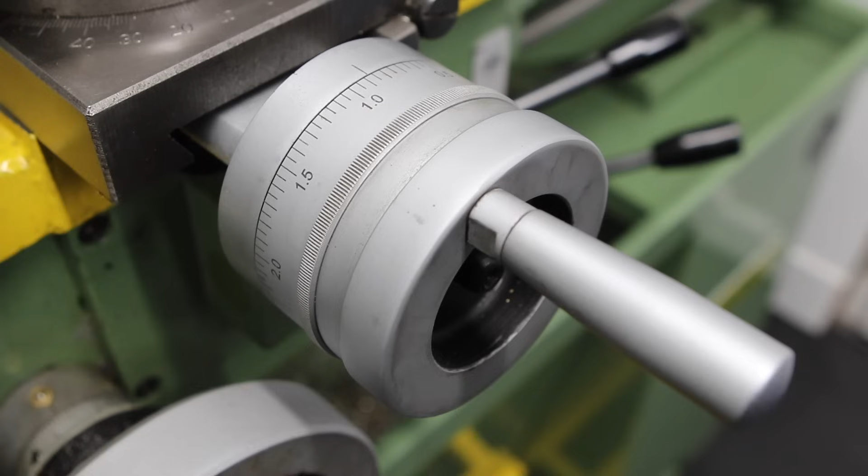I've got a plan to build myself a rotary table, and that rotary table is going to have graduations around the outside of it, very much like this hand wheel. Currently I don't have a solution for inscribing those graduations, so today's video is all about designing and building a simple dividing attachment for the lathe.

The first problem we need to solve is how to lock the spindle so that we can accurately scribe a line in the workpiece. The second problem is how to index the spindle around by a given amount. For the rotary table, I want a division every degree, so we need 360 divisions, 360 scribe lines.

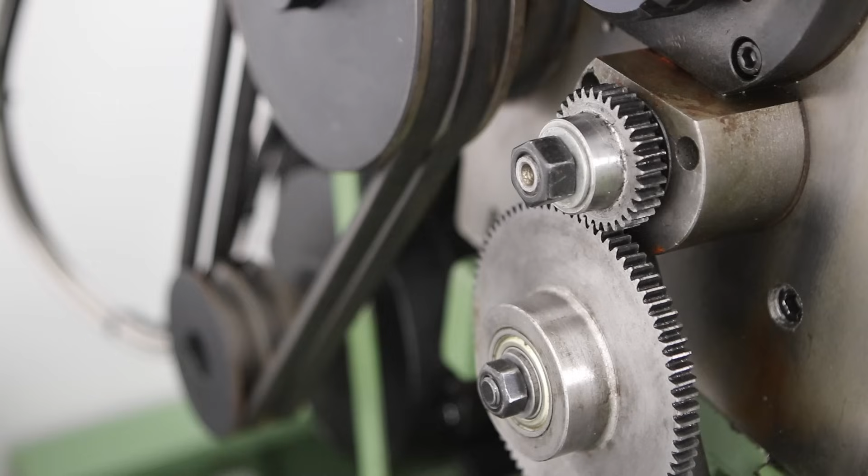There are many different types of dividing attachment for the lathe, but most of the homemade ones that I've seen tend to use the change wheels, as we can see here. What most people do is fit a spring detent that fits into one of the teeth of the gears to lock the spindle that way, and then the change wheels are swapped to different ratios to provide different numbers of divisions.

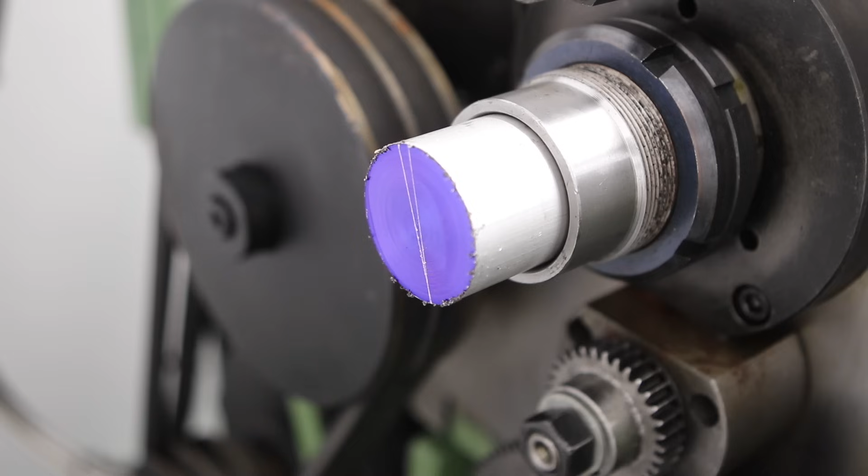But I want my design to be more universal so I can share it with you guys. So I'm going to go with a more generic approach and utilise the lathe spindle, or more specifically take advantage of the hollow nature of the lathe spindle. By doing this, I hope the device will fit a much wider range of lathes.

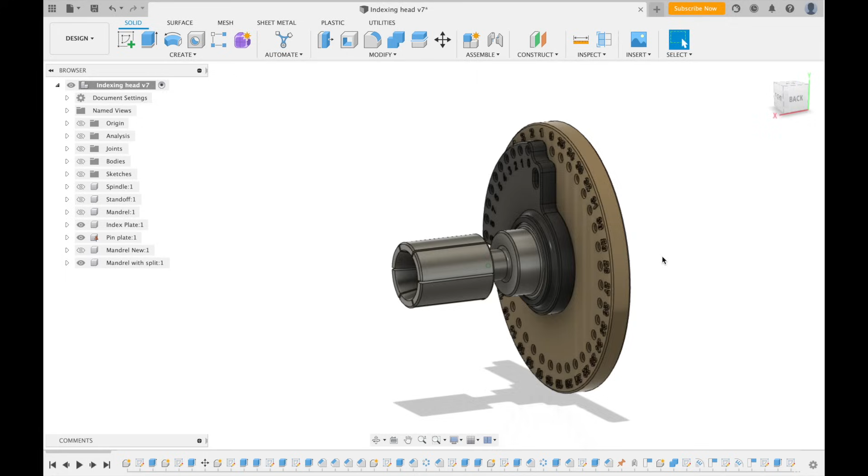This is the design I've come up with, and it works in a similar fashion to a spin indexer. The main components of interest are the expanding mandrel in the middle and the two pin plates. The larger brown plate and the expanding mandrel are coupled to the lathe spindle and therefore the rotation of the spindle and the workpiece. The smaller pin plate is held to the lathe body via a standoff to stop it rotating.

The core of my design revolves around this expanding mandrel, which I'm going to machine out of a solid billet of aluminium. We've got flanges on one end to act as attachment points for the pin plates, and the other end is the part that expands.

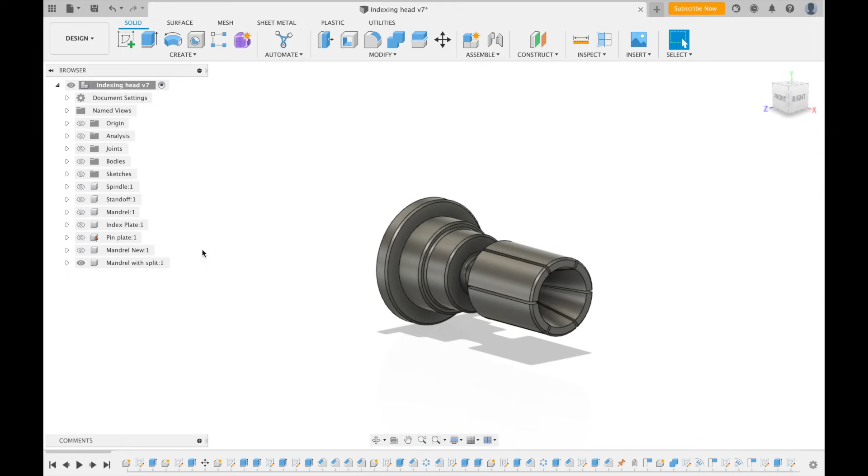There's going to be a shaft that runs through the middle with a nut on one end and a cone on the other. As you tighten this nut, it should force the cone into that tapered section, expanding the petals and locking the mandrel in place.

Next up, we've got this pin plate, and I want to use this to engrave machine dials. So I'm going to need 360 divisions for obvious reasons.

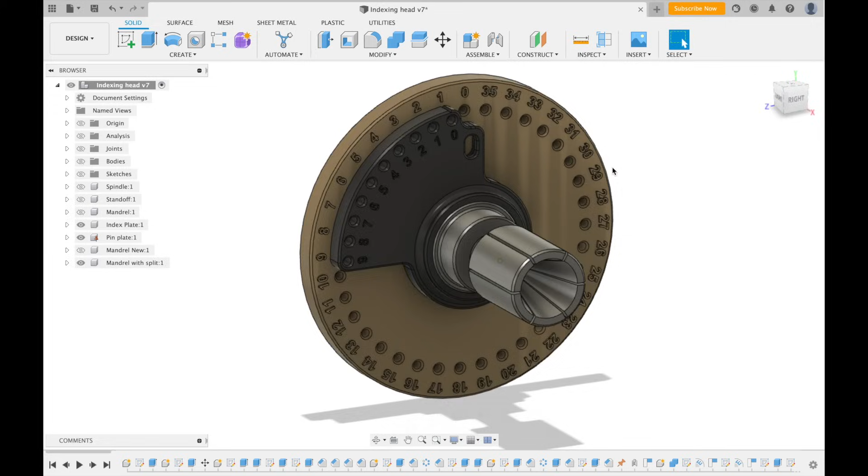Now, to get 360 holes on that brown pin plate would make it the size of a dustbin lid, I'm sure. So we're going to approach it using this secondary plate here, taking advantage of the difference in spacing between the holes in the black plate and those on the brown plate. There are 36 holes on the brown plate spaced at 10-degree intervals, and there are 10 holes on the black plate spaced at 9-degree intervals.

So if you imagine moving the pin from hole 0 to hole 1, or hole 1 to hole 2, the brown plate is actually going to move by the difference between the two, i.e. 1 degree. By using this arrangement, we can get up to 360 divisions, or any factor thereof.

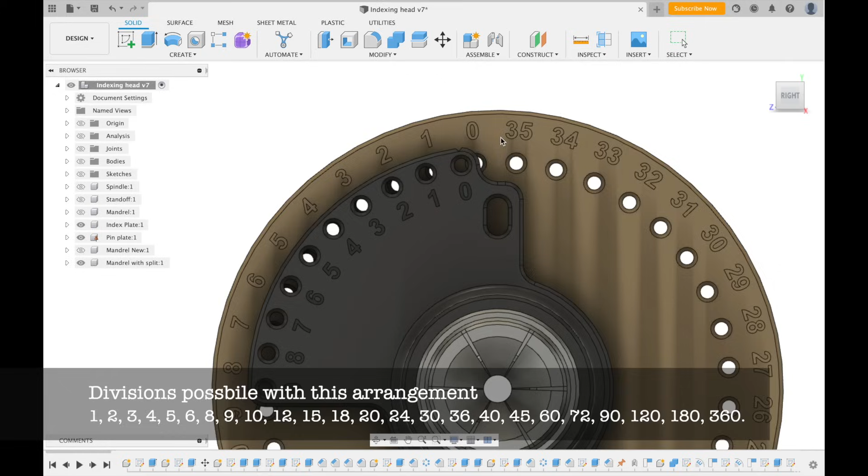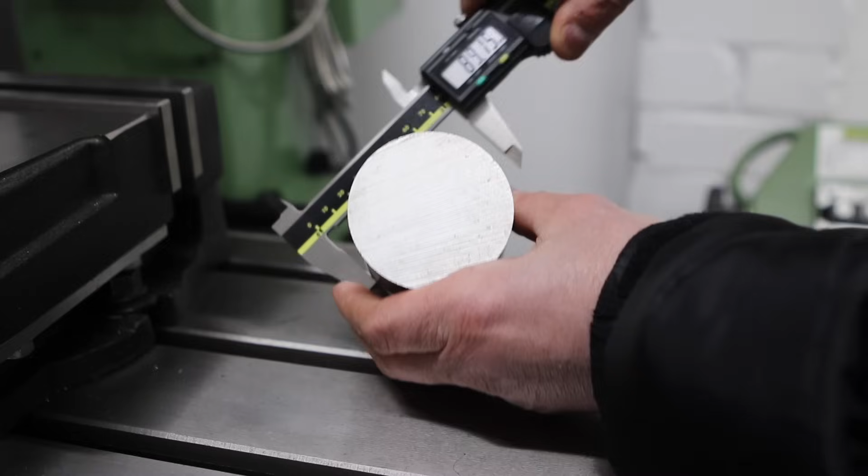Now I need to make the expanding mandrel, and I'm going to use this slug of aluminium that I've got here. It's approximately 63mm by about 105, which is 2.5 inches by 4.

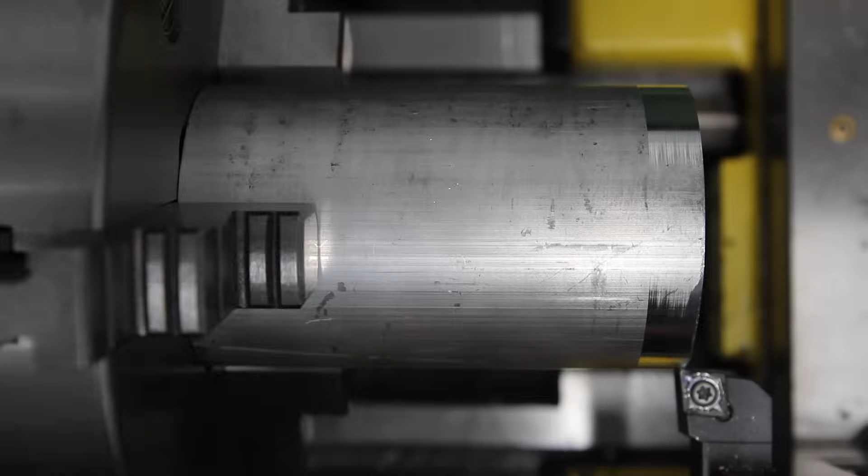So I've mounted the stock in the 3-jaw chuck, and I'm just facing the end off here. What I'm going to do next is turn down the OD on this one end, just to square things up before turning the workpiece round in the chuck.

Now we're working with a reasonable sized chunk of metal here, at least for me. It's 2.5 inches, which is bigger than I normally turn, so I'm not expecting too much in the way of deflection when turning it. Having said that, we have got a reasonable amount of stick out, so I'd like to bring in some tail support for extra security, so I'm going to face the end off here and centre drill it.

Now that we've got that tailstock support in place, I've started turning down the OD, and the next feature we need to machine is the flange that the secondary pin plate is going to sit on. That's going to be 46mm in diameter, so we need to turn this whole shaft down to 46mm.

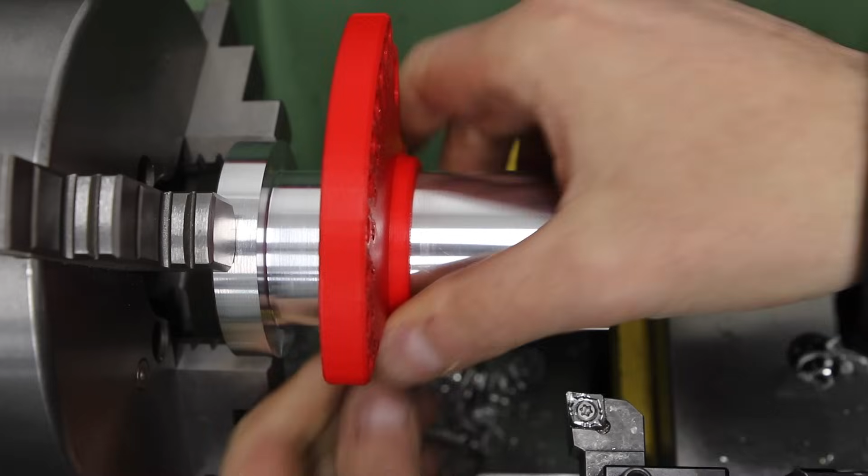Now, making prototypes of any description is a learning experience, right? And one thing that I learned on this project in particular was that mating 3D printed parts and machined parts is sometimes problematic. When I printed this pin plate component, I specified that this internal diameter should be 46mm, but of course it came out slightly undersized.

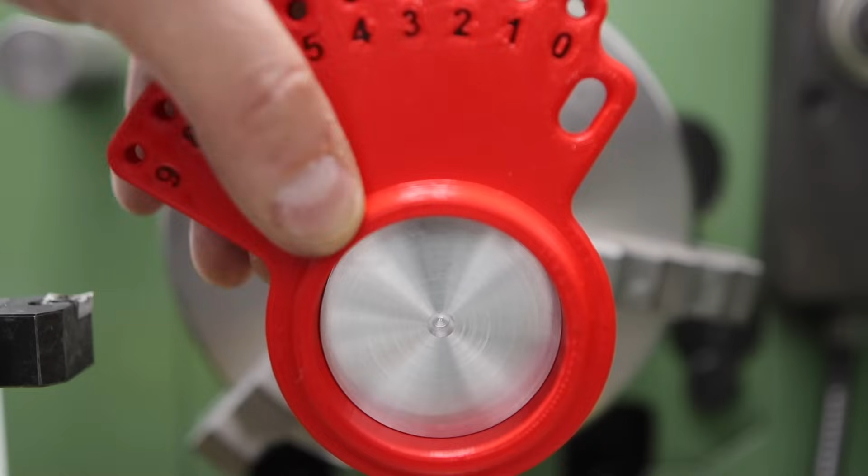So I then machined the shaft to try and fit it and ended up overshooting my dimensions. So that pin plate is actually a bit loose on that shaft, which is somewhat annoying. I think what I should have done was machined the shaft to a nominal dimension and then tweaked the 3D model to fit. And you know, it's obviously quicker, easier, and cheaper to reprint 3D prints than it is to machine expensive pieces of aluminium.

Anyway, let's crack on, and we'll see if this comes back to bite us later.

The next feature that we're going to machine here is the diameter that's going to slide into our spindle bore. Now, I want this to be a reasonably close sliding fit. I don't want it to be tight, but I do want it to be reasonably close so that it doesn't wiggle around too much. We keep the mandrel nice and square, and that also it doesn't have to expand too far and stress the mandrel in order to lock into place.

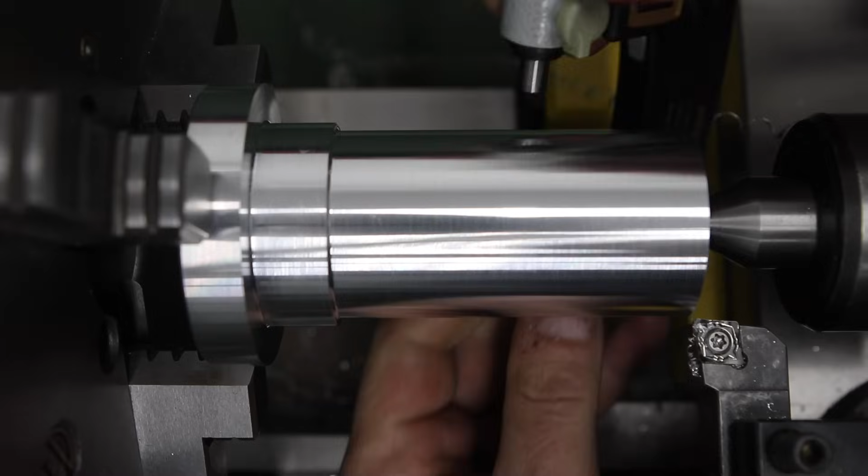I tried to make the design of this dividing attachment as generic as possible, so I'm fairly confident that it's going to fit most machines, certainly the ones with the Chinese type design. All you need is a hollow spindle bore and enough space at the back to mount and spin the index plates, as well as a place to mount a standoff that will mount to the first pin plate, and I'll talk about that in more detail later on.

If you are making your own, the only feature that you should need to change is the feature that we're machining right now. That needs to match the internal diameter of your spindle bore. Mine's 38mm, but yours is probably different. So just machine this feature to match the internal diameter of your spindle bore.

Next, I'm going to drill and ream a bore down the centre of this part to accommodate a shaft that is going to allow us to expand the mandrel. It's going to have a nut on one end and a cone on the other, and an 8mm shaft.

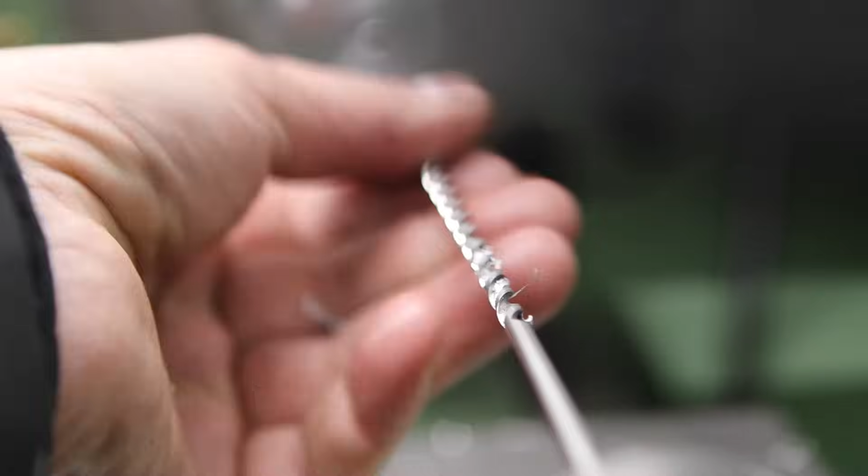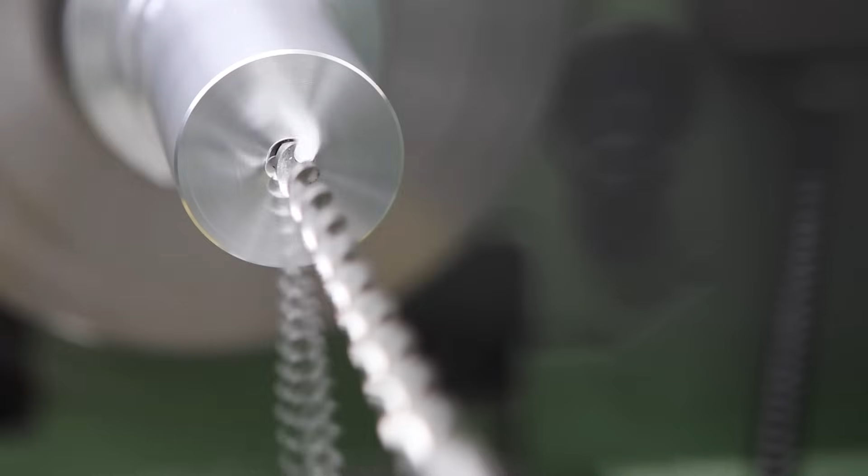Now, this is quite a deep hole, and I'm using a long series drill for this. This does introduce problems. It's quite a flexible drill, and we've got to be really careful not to make the drill wander off centre. So I'm taking really small pecks at this and clearing the drill regularly. Once I made it all the way through, I changed the drill for a larger diameter one, slightly undersized, and then finished it off with an 8mm reamer.

The next feature we're going to make is a relief, and the purpose of this relief is to thin the material enough that it allows the petals at the end of the mandrel that we're going to make later to flex and expand into the spindle bore and lock the mandrel in place.

Now, as you can see, I'm using this parting tool here to remove the material quickly for this feature, but other than the poor surface finish that we get on the bottom of the feature, this tool leaves us with one other thing that is undesirable in this case, and that's square corners. Now, as this feature of the part is going to be flexing quite a lot, square corners are a problem because they might introduce stress risers, which will then lead to cracks and premature failure of the part.

So what we're going to do is bring in this round nose tool to create some fillets in those corners and to finish the bottom of this feature to 28mm.

So this is where we are so far, and before we go any further, I want to remove it from the chuck and test fit it in the spindle bore.

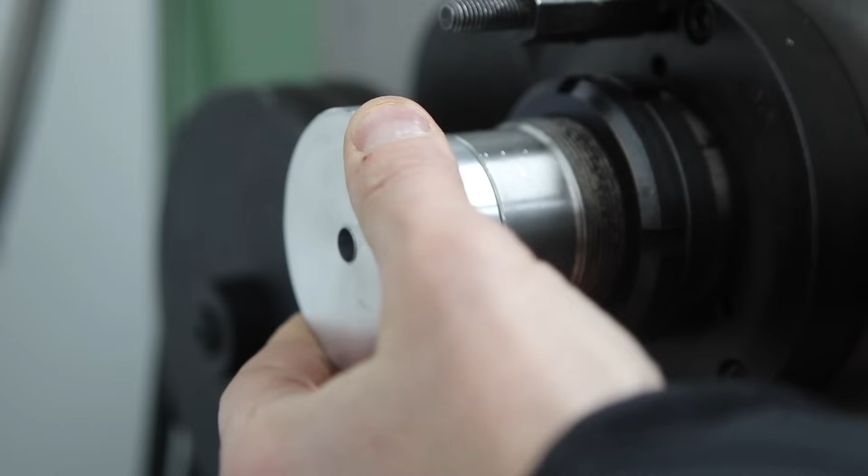And that is just the fit I'm looking for. A nice sliding fit, no wiggle, so I think that's going to work out just perfectly.

Given that I've removed this from the chuck and I'm now replacing it, we will have lost our concentricity, but I don't think that's going to be too much of an issue for this part because it's not designed to be spun at any kind of speed. It's going to be rotated by hand, so not a big deal in this case. If you were super concerned about it, you could have gone on to machine the rest of the features before doing the test fit in the spindle bore.

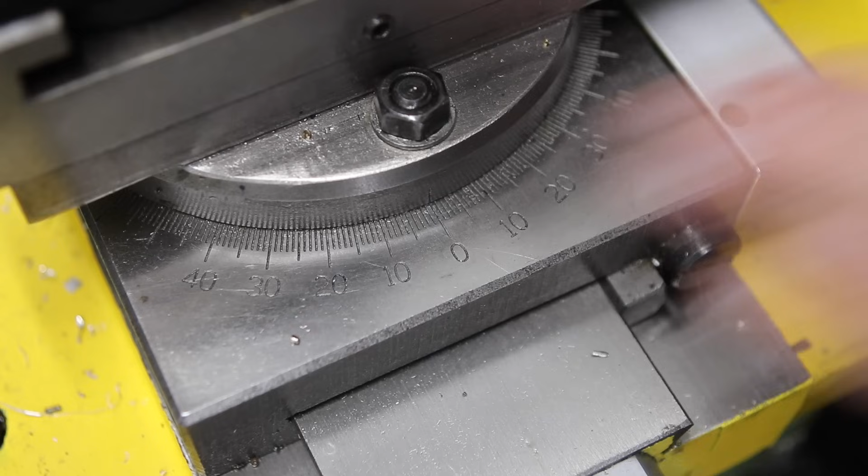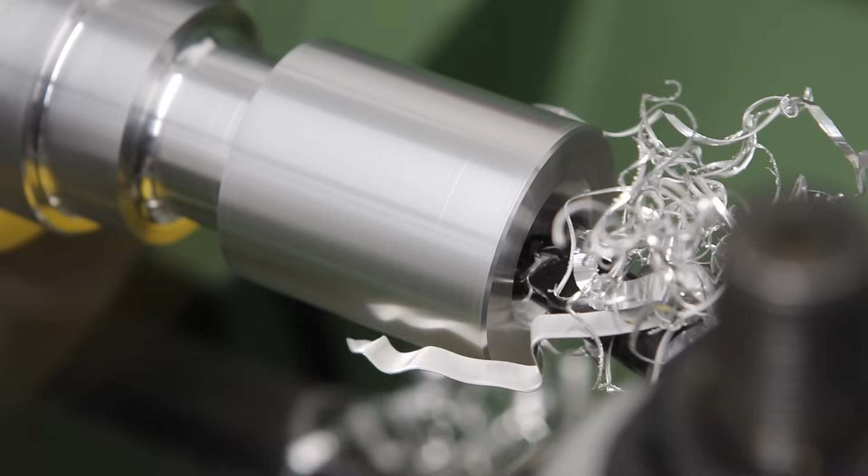What we're going to do now is to machine the cone in the end of the part. So I'm just moving the compound slide around to 15 degrees so that we can cut a taper in the end of the part. And the reason we're doing this is because shortly we're going to be slitting the end of this part to form petals, and then that'll allow a cone to be drawn into this taper and to expand those petals and lock the whole mandrel into the spindle bore.

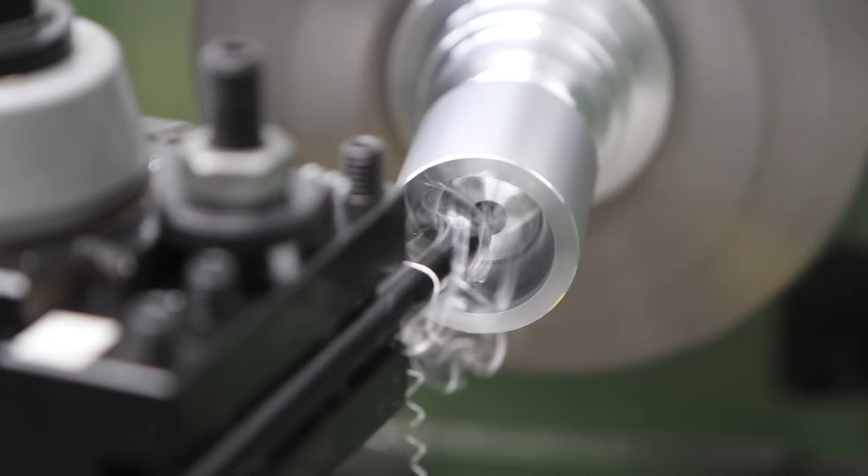And we're just going to finish this part off with some nice chamfers.

And yeah, another classic Jonesey bonehead move there. I ran the tool into the work as I was retracting it. So yeah, we're going to need to sort that out. And I'm going to machine in a nice taper here to delete my mistake.

Actually, I don't think that looks too bad, so let's pretend that was supposed to be there from the start, shall we? And we're going to flip the part round now so that we can machine that largest flange to final size.

Now, I could have brought this to size in the first operation when we were squaring the stock up, but I suspected that this being aluminium, these hardened steel jaws might chew the surface up, so I wanted to leave myself a little bit of stock just to clean it up and bring it to final size.

As I mentioned earlier, fitting 3D printed parts to machined parts can be a little bit problematic in that 3D prints often don't print to exactly the size you expect them to. For instance, this larger pin plate I printed to exactly a 62mm internal diameter, and it came out a bit smaller than that, about 61.6 or something. Also, depending on where you measure the 3D print, you can get different readings because of the ridges in the plastic and because of slight deformations from the plastic cooling and so on.

So I'm trying a different technique here. I've machined the main flange to 62mm, and obviously that doesn't fit. So I'm going to take another cut, just a skim cut, and try it again, and then rinse and repeat until it does just fit.

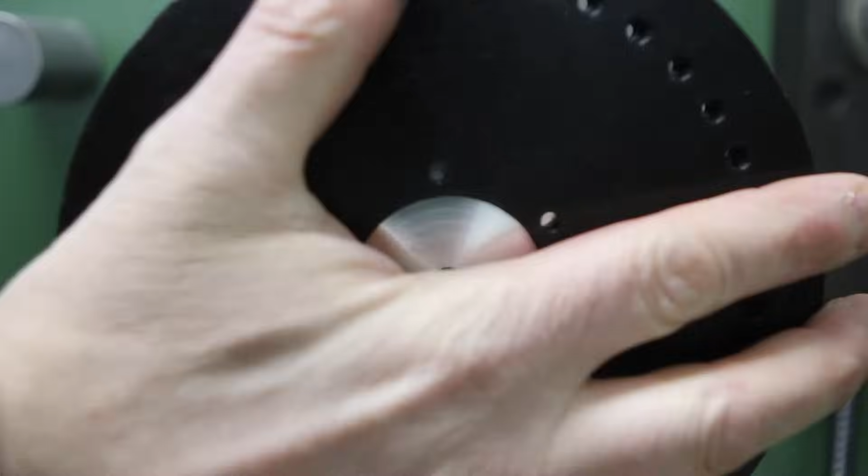And then, as you can see from this 3D printed part, we've got holes in it for bolts. So we need to go over to the mill now and drill that bolt hole pattern. We need to locate the part in the mill here so that I can line the DRO up and drill this bolt hole pattern, doing that with a pin, as you can see.

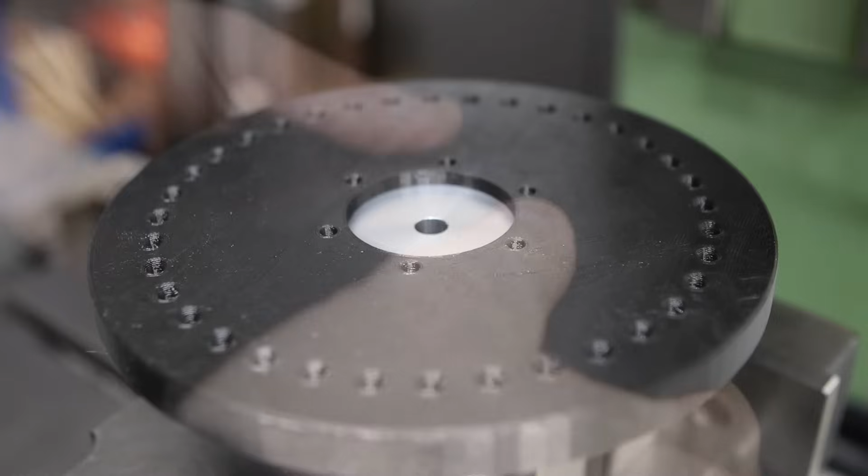And we don't want any more bonehead moves, do we? So I'm going to do an idiot check here and put the part on and use a little Sharpie just to fill in the holes, just to make sure that we're roughly in the right place for this bolt hole pattern and we're not doing anything terribly wrong.

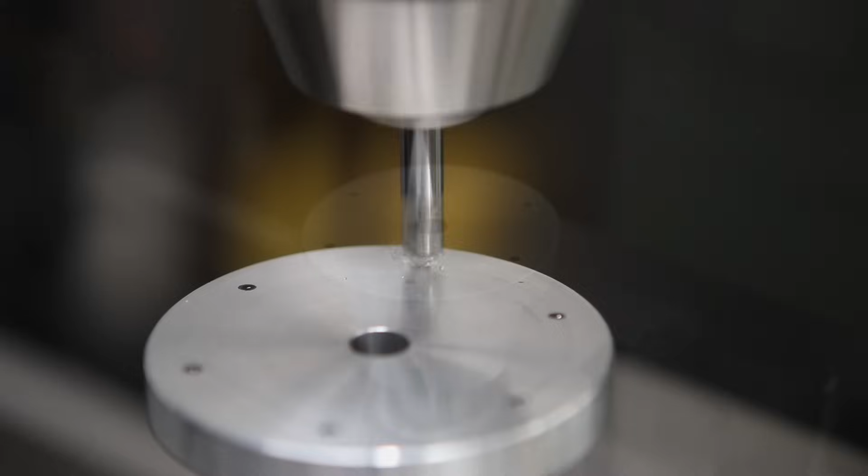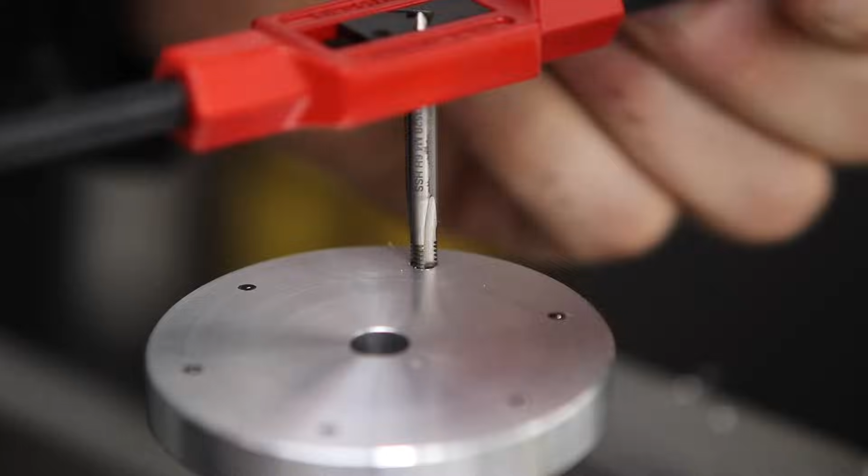Hang on a minute, that tap is slipping in the chuck. That is not a good sign. We're going to have to finish this by hand. I'm tapping this M3, which is a lot thinner than it looks on the camera here, and this is quite a deep aspect ratio hole. Given that it's aluminium, which is quite a gummy metal, you need to be pretty careful, otherwise you can end up breaking taps in this kind of situation, which, given the amount of work we've put into this part already, would be super annoying.

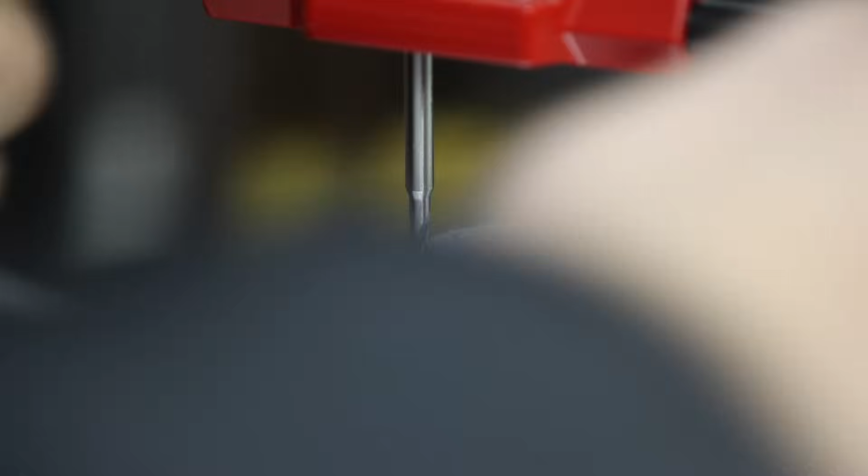Wait for it. Oh man, you had to see that coming, right? Oh dear me. Bonehead move number 2 of the day, and that was the last hole as well. Never mind, let's see what we can do about fixing it.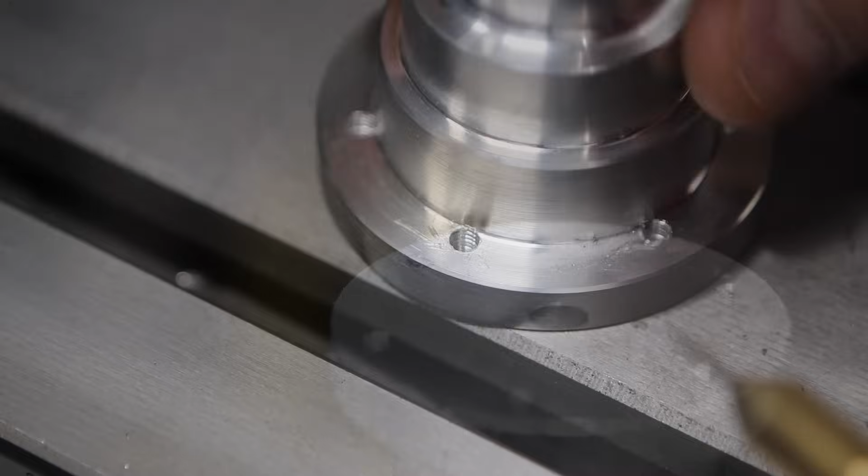So here's our broken tap from the other side, and that is going to interfere with the 3D printed part, so we can't leave it like that. I'm not going to be able to get this out, so my only option really is to grind it flat. And we're going to have to make do with 5 bolts instead of 6, and I don't think it's going to cause a problem in this situation. It's going to be plenty strong enough.

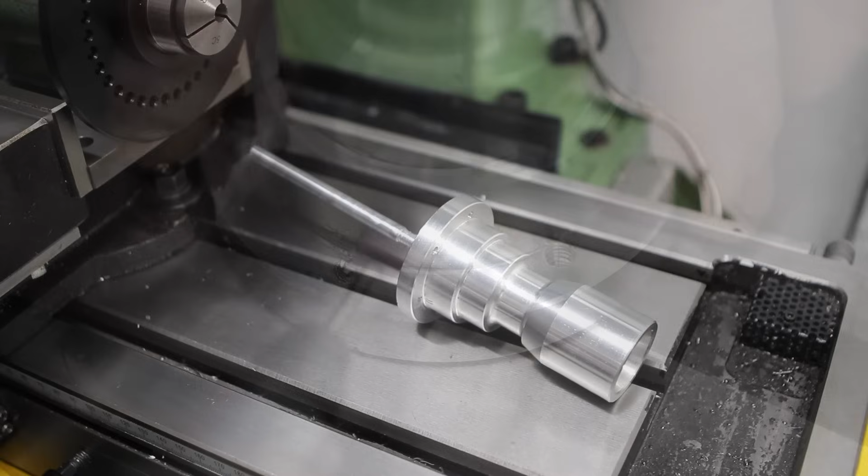And now to create the slits that are going to form the petals to finish off this expanding mandrel. I could just do this with a hacksaw, but I'd like it to be a bit neater and more uniform. So what I want to do is create 6 evenly spaced slits around the circumference of the part using a slitting saw.

I've got the part bolted to this thin mandrel here, and I'm going to use this to mount it in the 5C collet in the spin indexer. We're going to use the spin indexer to rotate the part by 60 degrees in between each cut.

Now this is going to be an extremely sketchy setup. We've got a very long part mounted on a thin shaft, a load of stick out, and no tail support. And the reason we're doing it this way is because it's an awkwardly shaped part. It's got that big flange on the one end, which makes holding it in the vise between V blocks very awkward, and we also need clearance for the slitting saw on this end.

So yeah, I figured that I'd take my chances, and it would probably be okay if I took light enough cuts. But actually, as I'm discovering here, it's really not rigid enough to cut all the way through. So plan B is to continue with the slitting and use these machined slits as guides. I'm going to finish it off manually in the vise with a hacksaw.

And that didn't go to plan either. As you can see, the saw blade has wandered off. It started in the slits at the top there, but as we've got further down the cut, it's migrated and looks like a right pig's ear.

So that would have gone a lot better if I had a bandsaw, but I don't have a bandsaw. So there we are. But anyway, this is a functional part, it doesn't need to look good. It's going to be inside my spindle bore, not on my mantelpiece. So as long as it works fine, then I'm happy with the result, I think.

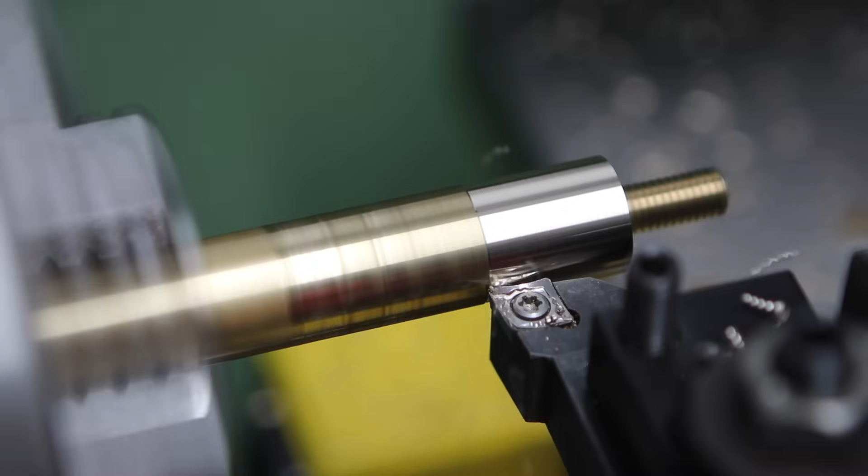Now, before we can start testing, we've got 2 or 3 other parts to make, and the first is this standoff. It's a quite simple turning job. I'm making it out of brass. It's got an M6 threaded rod on one end and an M6 threaded hole on the other. And the purpose this serves is to lock the first pin plate against rotation of the second pin plate. This will make more sense when I do a demonstration shortly.

One of the most crucial components of the whole assembly is the cone that we're going to make right now out of mild steel. This cone sits on the end of a shaft, an 8mm shaft that goes through the entire mandrel, and on the other end of the shaft is a bolt that, once tightened, will draw this cone into the mandrel and expand those petals that we cut earlier on.

So I've just cut the thread for the shaft, and now I've set the compound slide over to 15 degrees to match the taper that we turned on the cone inside the mandrel earlier on.

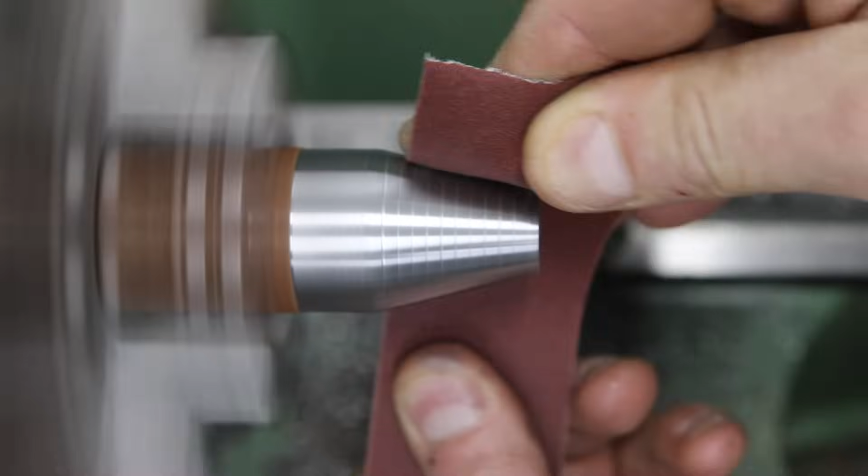Just cleaning up that dodgy looking surface finish there with some emery cloth, and the next job is to bring the part to length. Then we're going to part it off, and then we're going to flip it around in the chuck and screw it onto a screw mandrel to finish the other side.

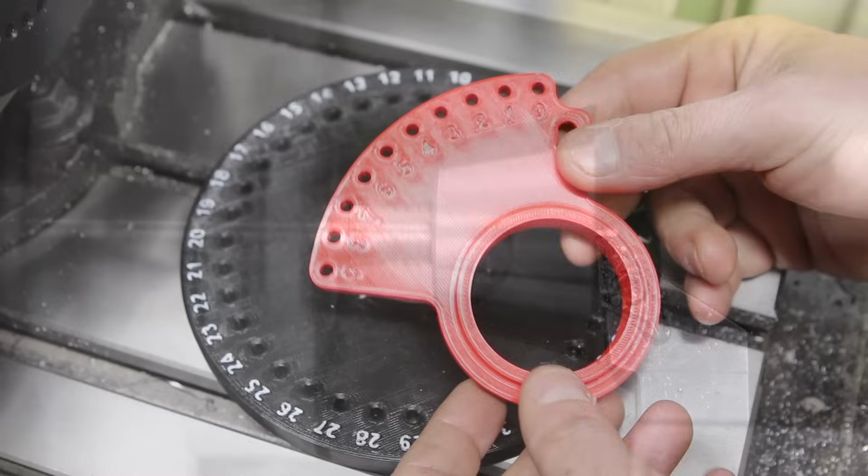These are the two 3D printed components, and this red one here is the front pin plate. It's got a number of numbers and holes in the front, which I'll explain in more detail in a minute, and a fixing there for the standoff that we made earlier. This is the rear pin plate. We've got 36 holes in this, numbered around the outside every 10 degrees, and the bolt hole pattern there is for fixing the expanding mandrel.

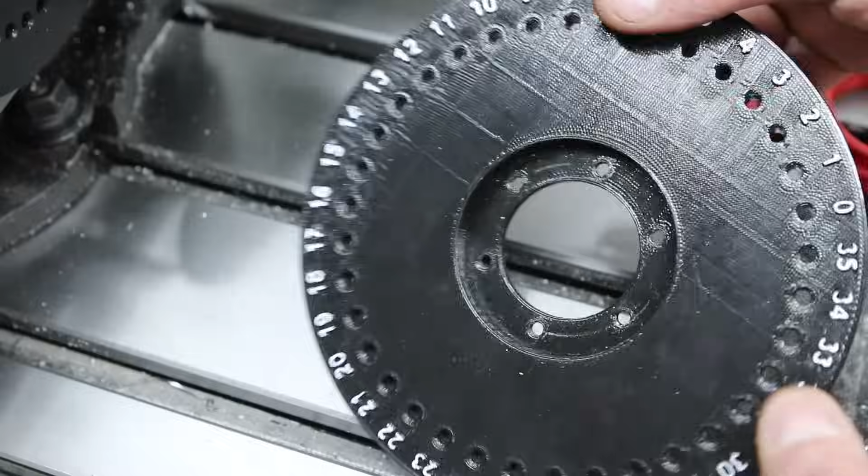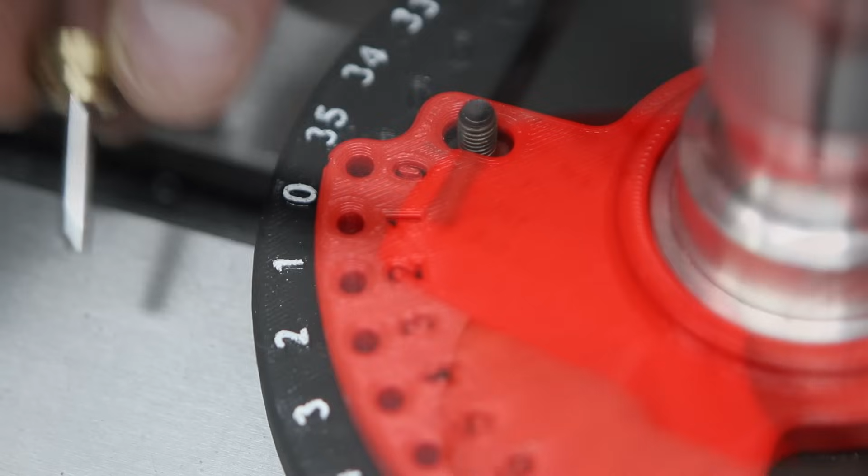One thing to note with these 3D printed parts is that they do print a little undersized sometimes, as I mentioned earlier. So coming back in here with a 4mm reamer just to open those holes up so that it fits the pin that I made off camera, which you can see here. This is just a stainless steel pin with a tapered section on the end and a brass head on the other end.

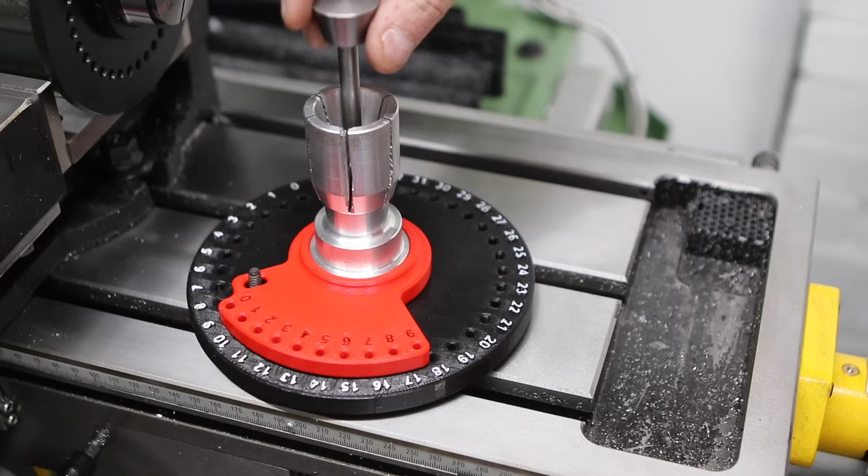So we're on to final assembly now, and before we get to the testing, I just want to explain briefly how I intend this mandrel to work. So this shaft has a nut on one end, and as you tighten that nut, it draws the cone into the tapered section of the mandrel, expanding the petals and locking via friction the mandrel to the inside of the spindle.

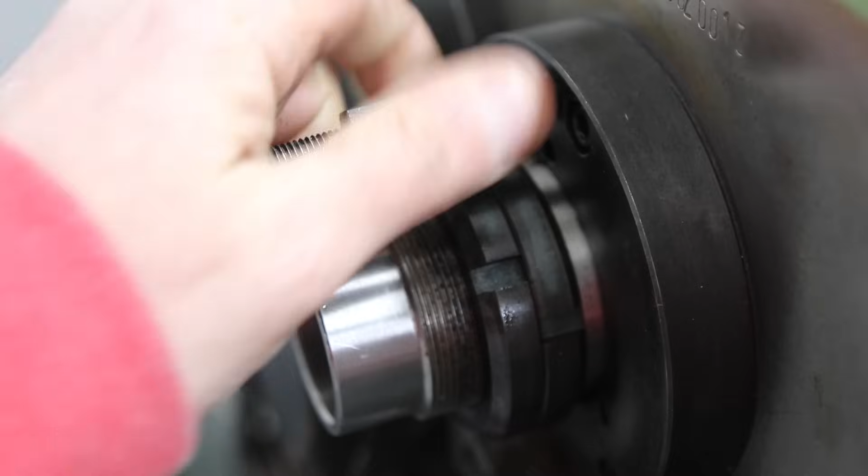Or that's the plan, at least. So let's start by installing our standoff. It's going to replace an existing standoff that's there to support the cover. The one that I've made is slightly longer and has a different fixing on one end.

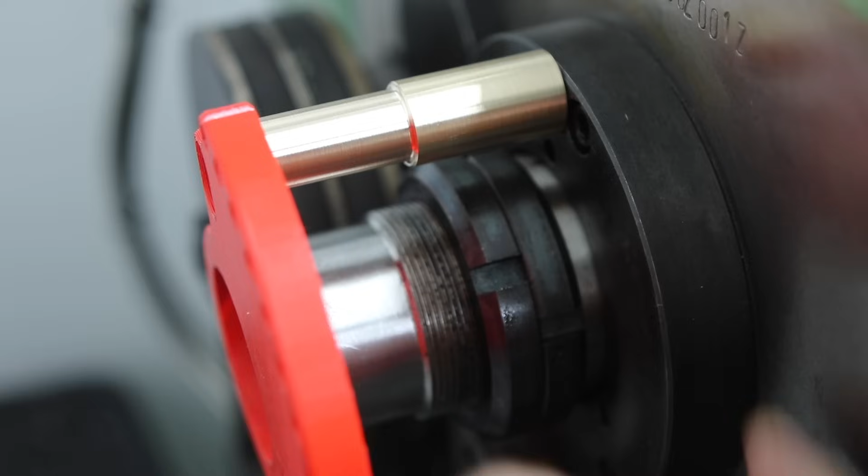Now we're going to screw the front pin plate to this standoff, and we're going to use this as an anchor point. It's fixed here, and it's also fixed to the mandrel itself, so that when we push a pin through this plate into the back plate, we can actually lock the rotation of the spindle. It also allows us to index the spindle by moving the pin to different holes.

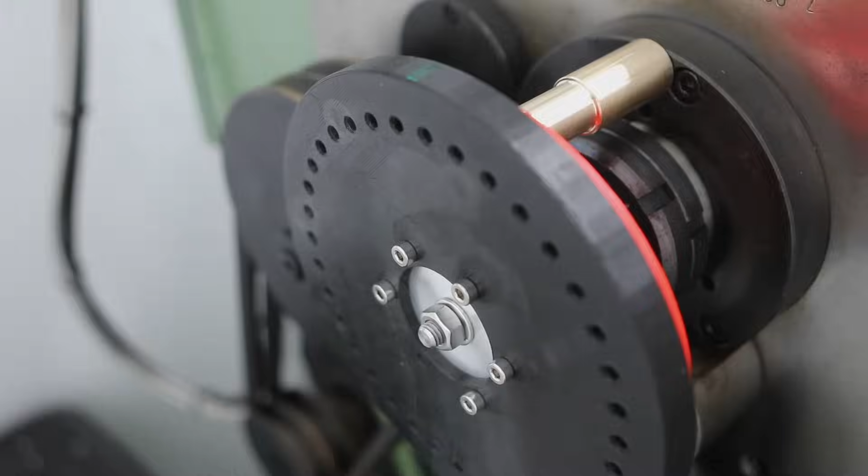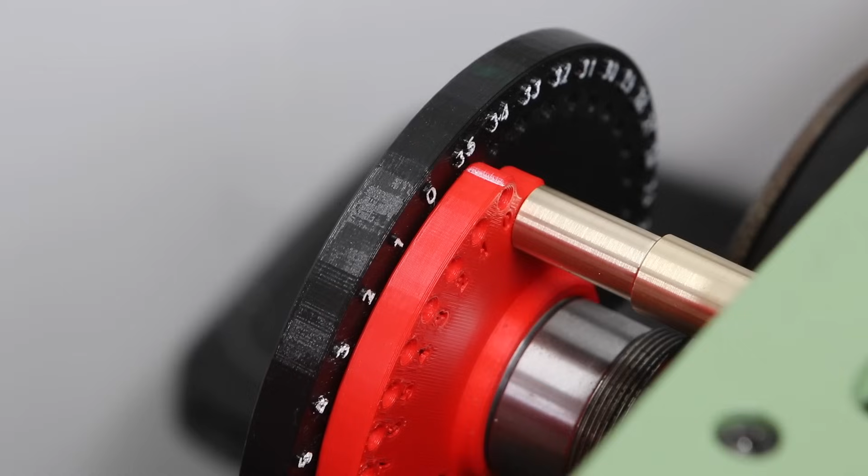All we need to do now is to nip up that nut to expand the petals inside, and the rotation of that black plate should be coupled with the spindle. And that I'm really pleased with. Honestly, I couldn't be happier. With the slightest pressure on that nut, the mandrel has locked solidly in the spindle shaft, which is just what we want.

We have this white mark here, and that's what we use to read off the angular position on the black dial there. So if I get the pin and pop that into the 0 position on both the front plate and the back plate, we're now at the 0 position for the spindle. There's no perceptible play in the system here, which is great news, because if there were, then that would affect the positioning of the workpiece in the spindle, and therefore the accuracy of any features that we're intending to machine onto that workpiece. Now we'll use this pin here to select some different angular degrees.

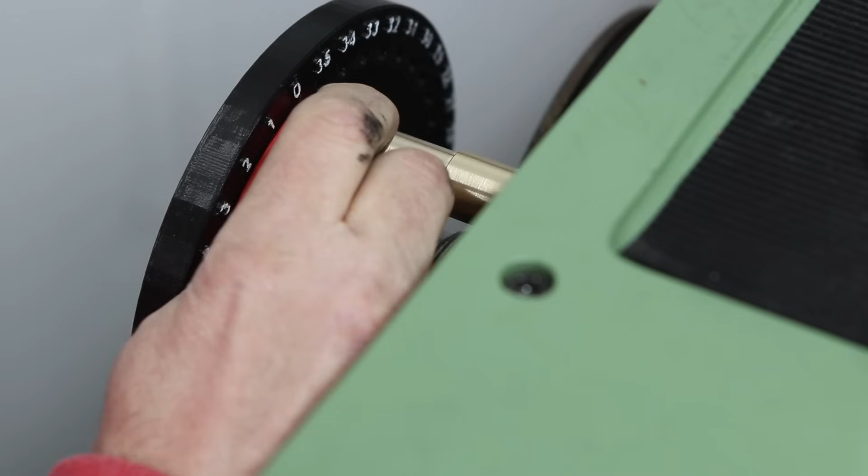Now this front pin plate has 10 holes numbered from 0 to 9, spaced at 9-degree increments. The black plate, the one at the back there, the holes on that are spaced at 10 degrees, so the difference between the two is 1 degree. So therefore, every time I increment the pin by 1 hole, we move by 1 degree.

We continue like this all the way around to 9, and then to get to 10 degrees, we move the pin back to 0, but lined up with the 1 there. Now, because of the parallax error in the camera, it looks like we've gone past the mark there, but it is actually lined up with the 1 exactly.

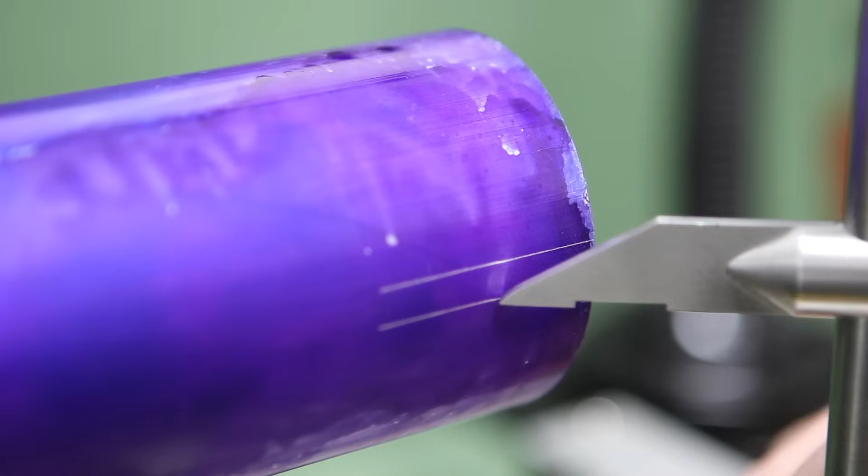Now on to some testing, and what I've done here is I've blued some stock up in the chuck, and I'm just scoring it with my centre height gauge here and indexing around 10 degrees for every pass. Initial results are promising. It looks to be working exactly as I intended it to.

So time now to move on to some finer resolution graduations. I'm just putting in every 5 degrees now, and that too is also looking fine. So I'm going to move on to 1 degree increments.

On first inspection, I thought we were going to be just fine with these 1 degree divisions, but on closer inspection, you can see that actually some of the spacing in between the divisions is somewhat unequal. I think at least some of the problem is the fact that I'm using this centre height gauge as a scribe, and I'm moving it around on my cross slide here over these oilers and so on, and it's not a very stable platform.

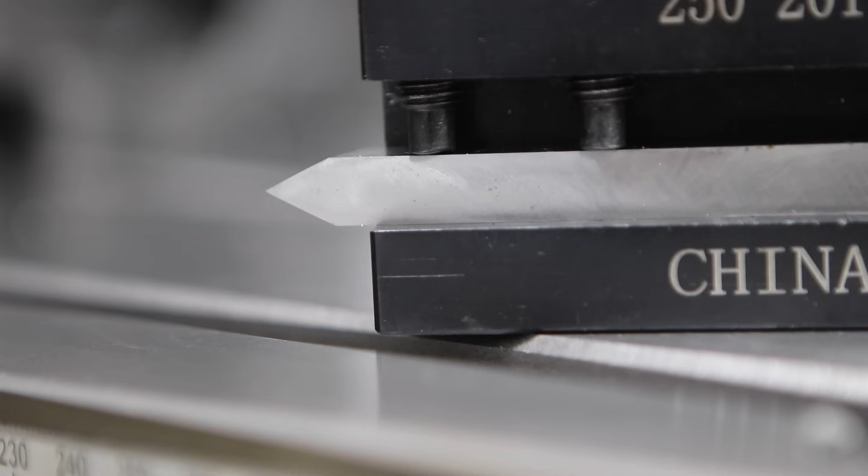So I'm going to try again with one of my HSS threading tools turned on its side and mounted on the tool post. Hopefully this is going to be a bit more stable.

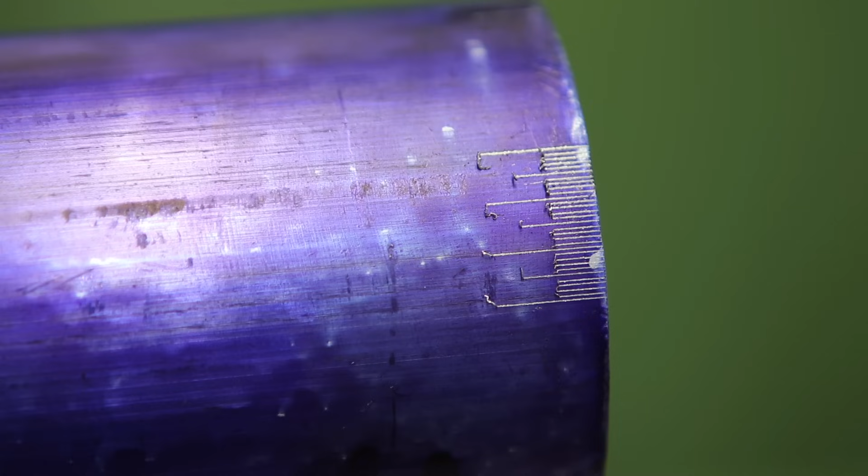So that has made a bit of an improvement. It's still not perfect. As you can see, we've still got a small error, I think. Probably not more than 1/4 to 1/2 degree, but there is this little bit of variation between those single degree graduations in some cases. So there's still a bit more debugging to do. I think I'll do that in the next video.

I think the next thing to look at probably is the fit between that red pin plate and the mandrel. I think that's probably the culprit here. But overall, I'm really pleased with the progress so far.